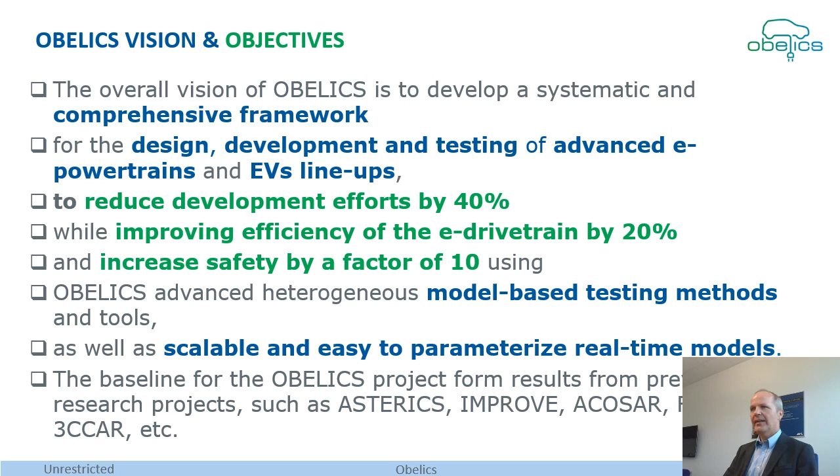This shall lead to a reduction of development efforts by 40%, improved efficiency of drivetrains by 20%, and an increased safety by a factor of 10. The project started in October 2017 and lasted until November 2020. With a budget of 9 million euro, we had 19 partners from 9 different countries, which were car manufacturers, software, hardware, and tier 1 suppliers, SMEs and research organizations, as you can read here.

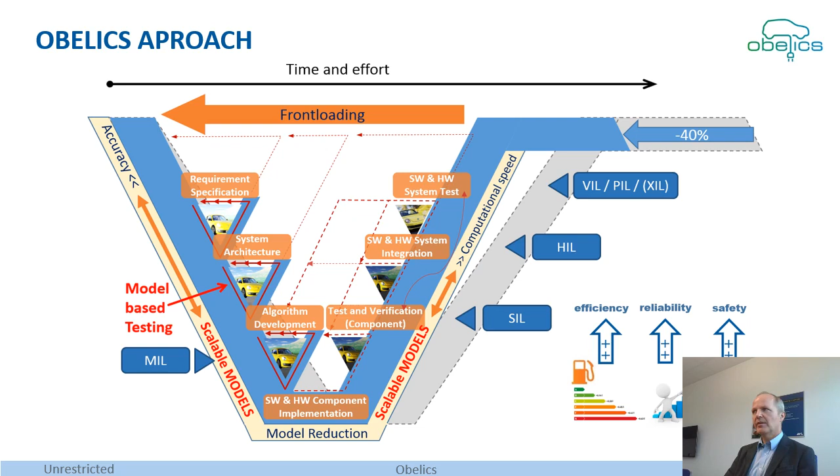The approach of OBELICS is a front-loading approach, where critical tasks are done early in the development phases, supported by models, scalable models along the entire development process, and with testing methods which are mainly model-based testing methods. With that approach, we want to reduce the development effort by 40%.

Now in Work Package 1 we have defined our use cases, and in Work Package 5 our safety assessment methods, which have set the boundaries and the requirements for the work in the project. In Work Package 2, 3 and 4 we have developed our models with real-time capability and the model integration methods as well as the functional testing methods.

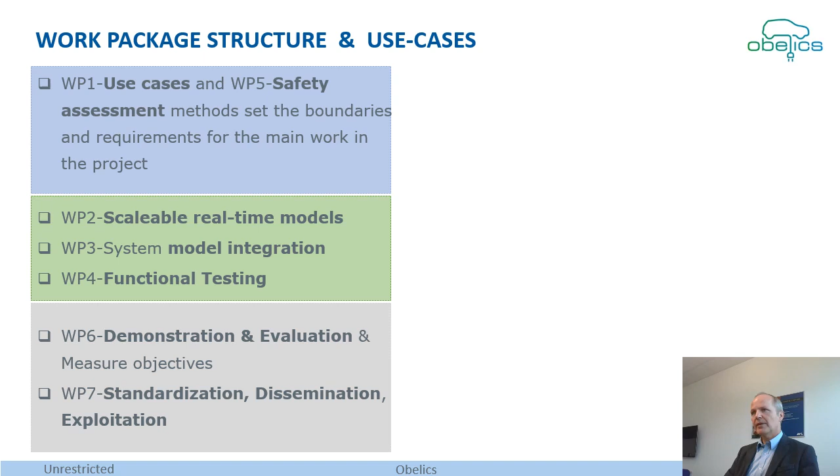On the other hand side, we have formed 4 different use case clusters which represent engineering categories. The first category is eDrive concept and component sizing in early design phases with 3 use cases. In use case cluster 2 we have e-vehicle system integration and optimization based on real-world data with 5 use cases. In category 3 we have battery design and testing for improved safety and reliability with 4 use cases. And in use case cluster 4 we have e-motor control and inverter design and testing.

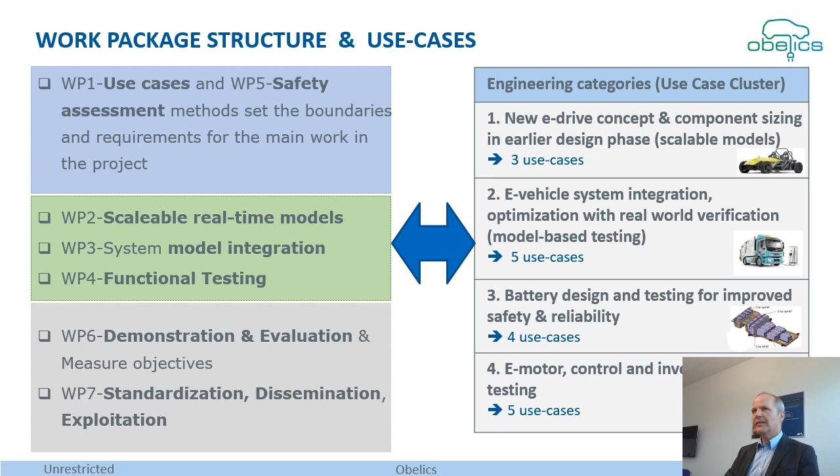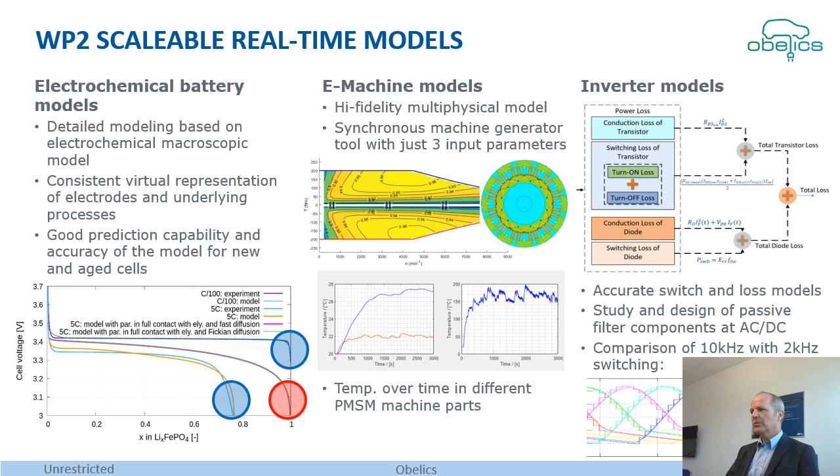Now you see here 3 examples in Work Package 2: an electrochemical battery model based on macroscopic level, which is very good for representation of aging effects of the cell. Then we had an e-machine model with high fidelity multiphysics, where we had a generator tool that created with just 3 input parameters the complete machine. As a third example, the inverter models, which were accurate switch and loss models, where we could study the design of passive filter components at an AC/DC level. And we could do the comparison of 10 kHz with 2 kHz switching frequencies.

In Work Package 3 we did system integration and optimization, where we started from a very high accuracy physical model and put in some thermal system integration models, where we could then study control strategies and automatic calibrations with real driving conditions. For real-time capabilities, complexity reduction of the models was needed. And with that, we can do EV optimization and trade-off analysis. Finally, there was a simulation toolchain with FMI and FMU model integration, co-simulation and signal delay compensation available.

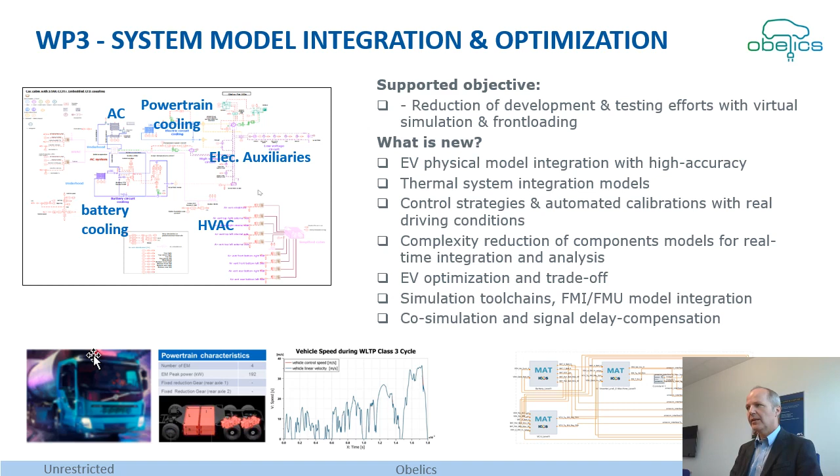In Work Package 4, we investigated functional testing methods. For the battery testing, we have realistic high-frequency testing up to 20 kHz, which was controlled by an FPGA-based controller platform. As an example, we have also developed EIS testing signals, multi-sine, for fast scanning of the battery cell.

On the inverter testing side, we had a real inverter connected with a distributed hardware platform, where the models of the e-motor and the battery and the control unit run in real time. This allows us front loading in early stages of the development phases. You can also emulate sensor values, and you can eliminate bugs very early before the HiL environment. On the right hand side you see a comparison between the calculation times of a PC-based embedded CPU and FPGA-based calculation of the controller.

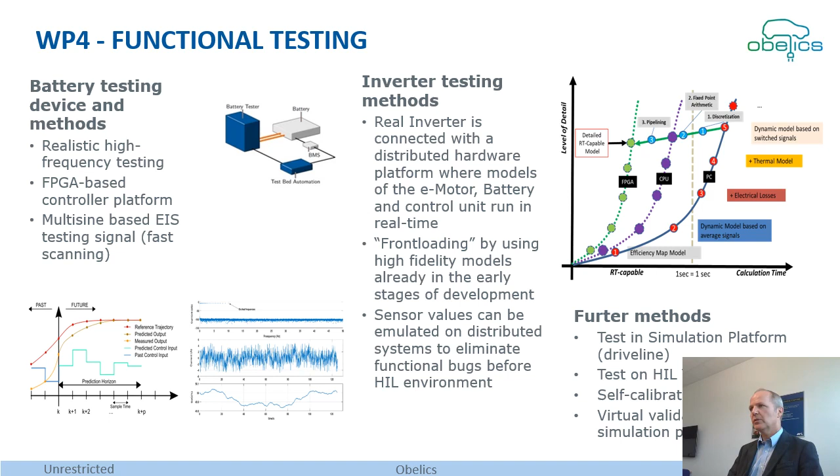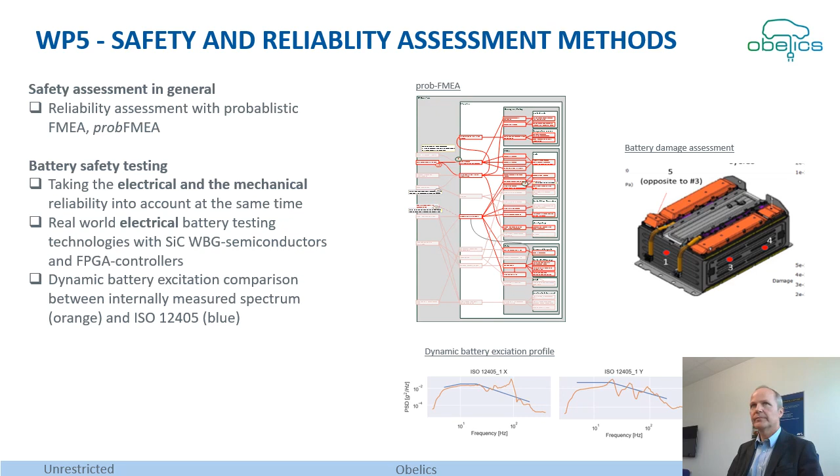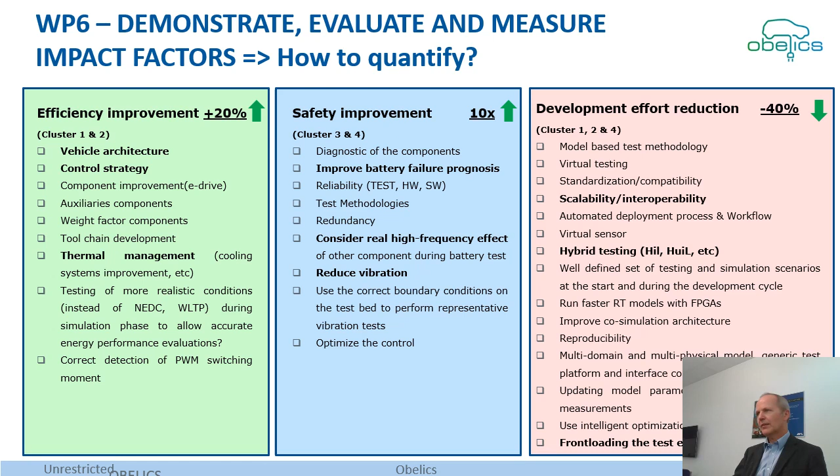Then finally, for the development effort reduction, we have a lot of factors like the scalability or the interoperability of models, the hybrid testing solutions, or front-loading approaches for testing. You see there are a lot of influence factors for these final numbers.

Now you can see here an example for the demonstration and the evaluation of a use case, example 4.3, which is the inverter design and testing. This has been done at the Power Hil setup from AVL, where the battery and the E-motor were emulated and the inverter was here in real. This allows a 4-quadrant operation of the engine in real time, and also error stimulation and manipulation of this E-machine. There's of course no mechanical danger from the rotating parts if you have it in virtual form.

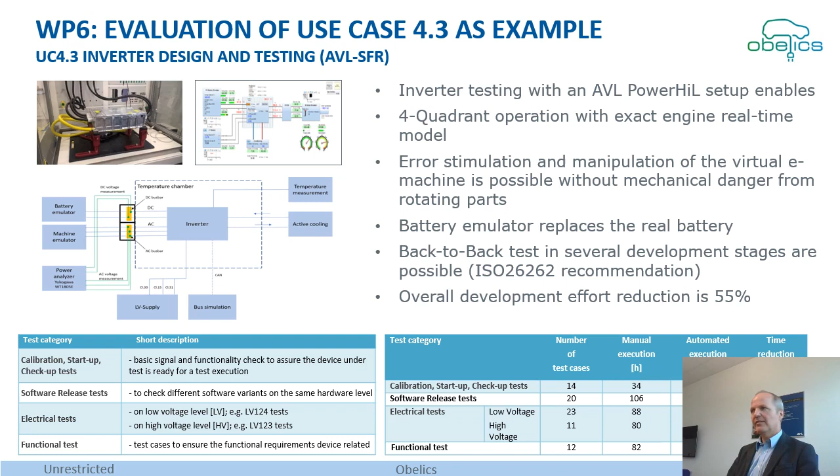The battery has been replaced by a battery emulator, and back-to-back tests have been performed in several stages of the development. The overall effort reduction with this automatic test is 55%. And this comes together with the numbers below in this table, which you cannot see complete. But there are a number of test cases, the manual execution and the automated execution. There's a specific time reduction for each test, and if you combine that, then you see that this is 55%.

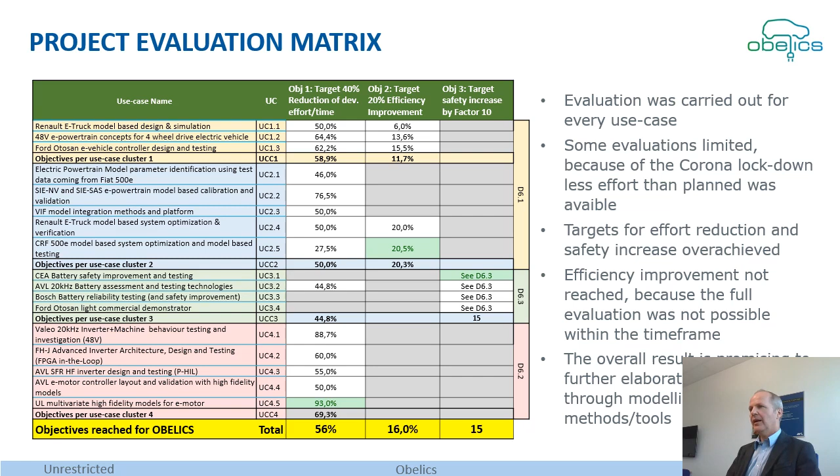If we now put together all results from every use case, then we can see that the overall reduction for the development effort is on average 56%, which is more than we had planned actually. For the efficiency improvement, we have reached a value of 16%. This is less than expected because we could not do all planned assessments for use case cluster 1 due to the Corona lockdown. For the safety increase by a factor of 10, we have done all tests in the battery cluster, and we have reached finally a factor of 15.